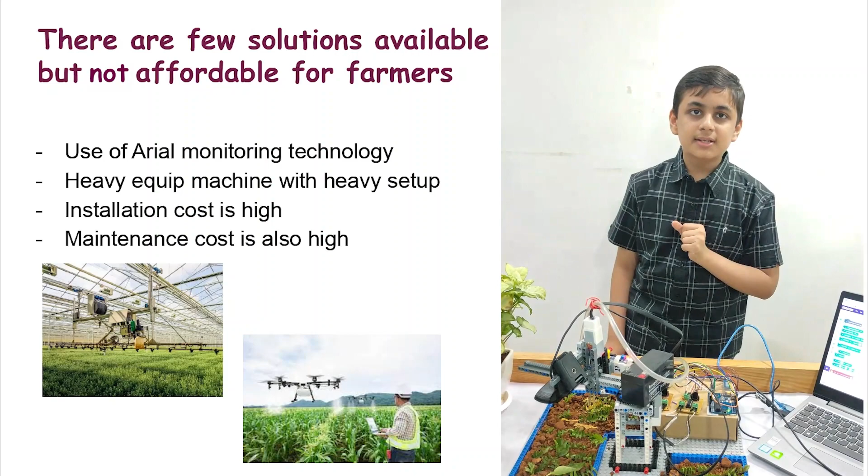Let me tell you a little bit about this project. It's here to solve the hardship of farmers by reducing their workload, as farmers themselves cannot check the acres and acres of land that they own. So some crops go to waste, reducing the crop yield by a lot. This is a solution to all the hardships of the farmers.

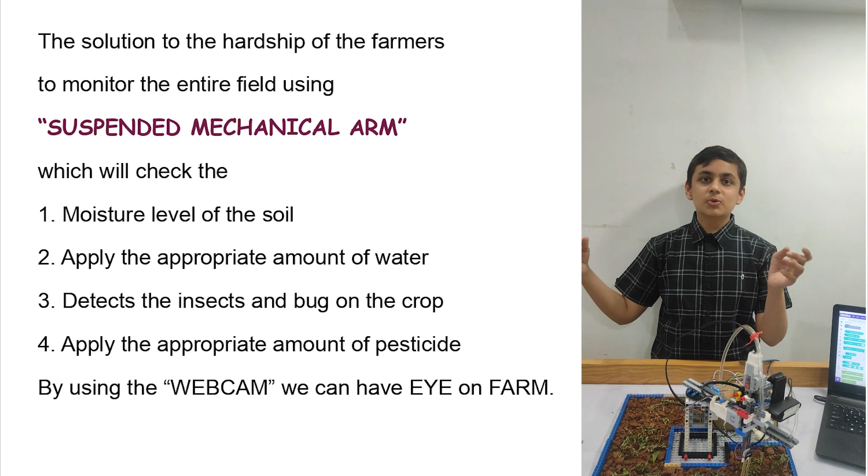This is my robot, the Agribot. I've designed it to be a 360-degree rotation robot. It can monitor the entire area of the farm. It can water the plants. It can check if there are pests and even report the findings to a central control center where the farmer or a worker can monitor the entire farm remotely, freeing the farmer to do various other tasks and not waste their time monitoring the farm plant by plant, reducing the crop yield.

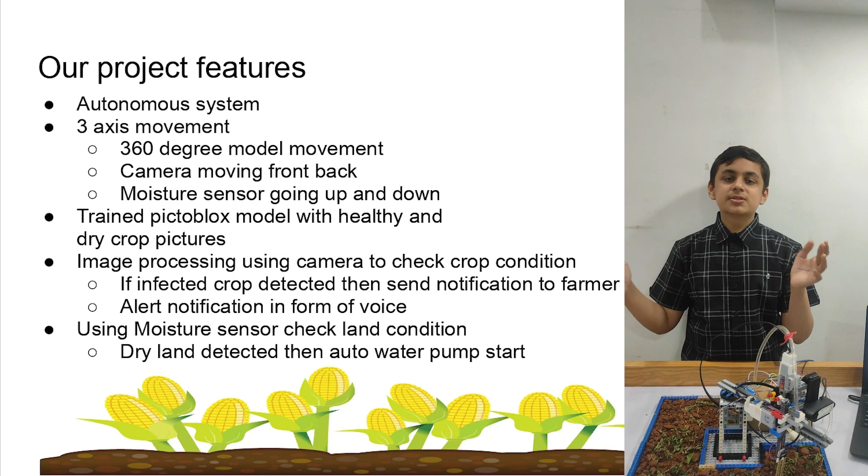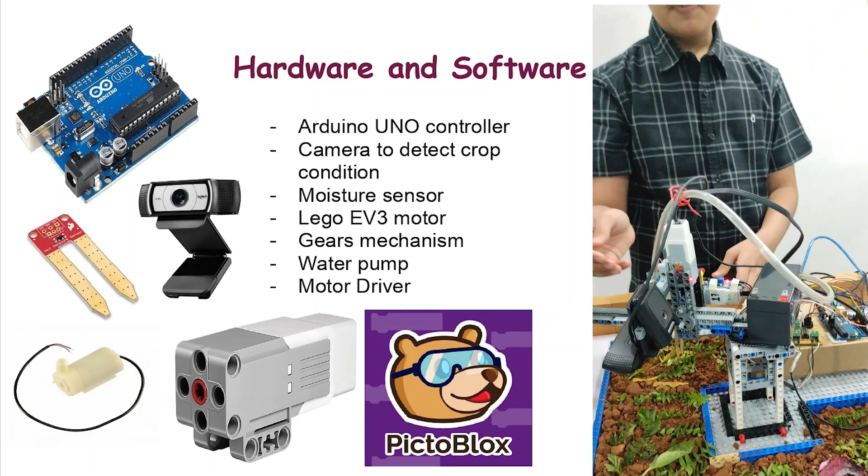Now I'll be explaining the hardware. We're using the PictoBlox software to help with the Arduino, which is connected to the motors used by the motor drivers. We're also using a webcam, a moisture sensor and a water pump. The water pump is to water the plants, the moisture sensor to check if the plants need to be watered, and the webcam to give alerts and check if the plants are infected or not.

In my software, I'm using the lovely PictoBlox software which is helping me turn this complex code into a very simple format. We are using multiple different extensions, for example machine learning, image processing and Arduino to control this entire complex system.

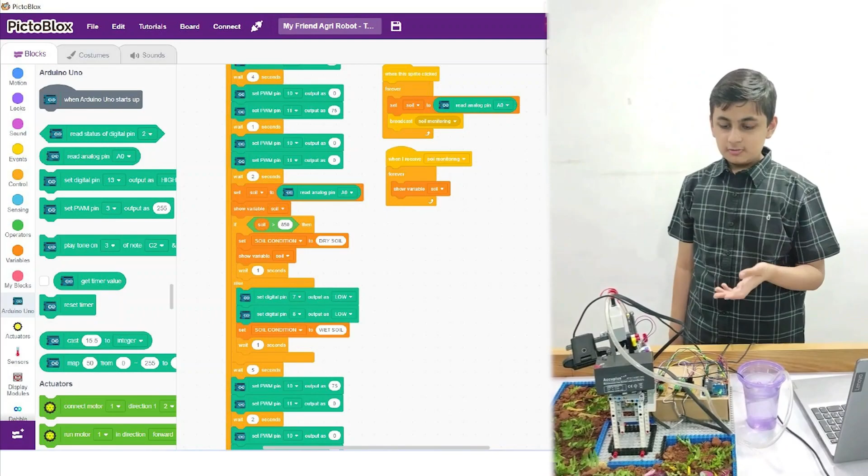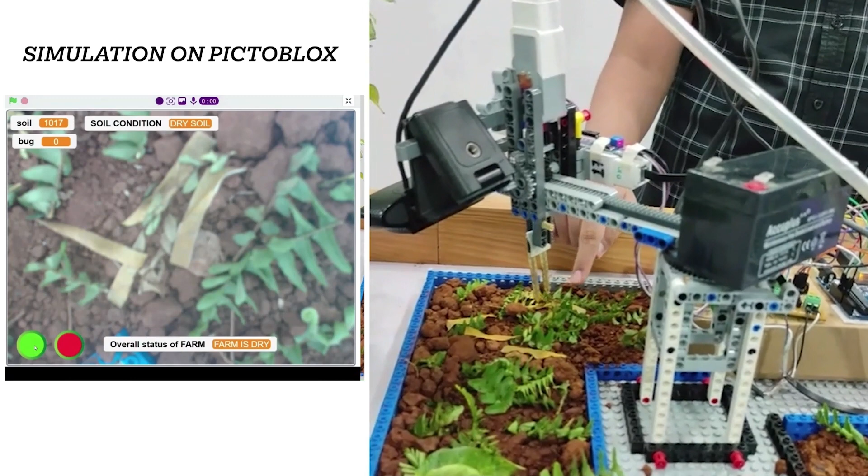Now I'm going to show you the working of my project. This motor will move this forward. This is the moisture sensor which is going to check if the soil needs water or not. Right here the soil is dry, so the motor is going to drop some water now. That makes the soil moist, allowing this to come back up. Now this will go back, and then this will continue on to the next land.

Now again this will be going forward, then down. As you can see, the soil here is already moist, so it's not going to be dropping any water. So now this is going forward and the moisture sensor is going down, and the land here is dry, so it's going to drop some water, and now the land is moist, so the moisture sensor can come back up.

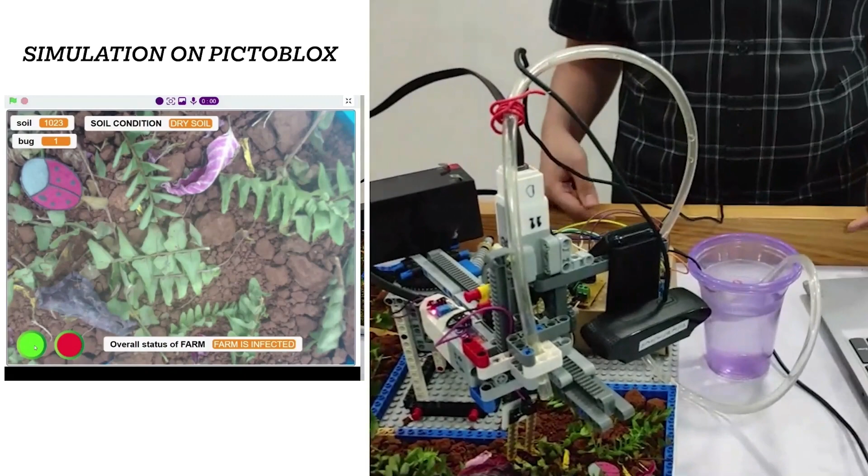Now we're going towards the last plot of land, and over here the webcam will notice that this place is infected. So then it will send an alert to the software telling that this exact plot is infected, and it looks to be dry, so it's now also going to put some water over there.

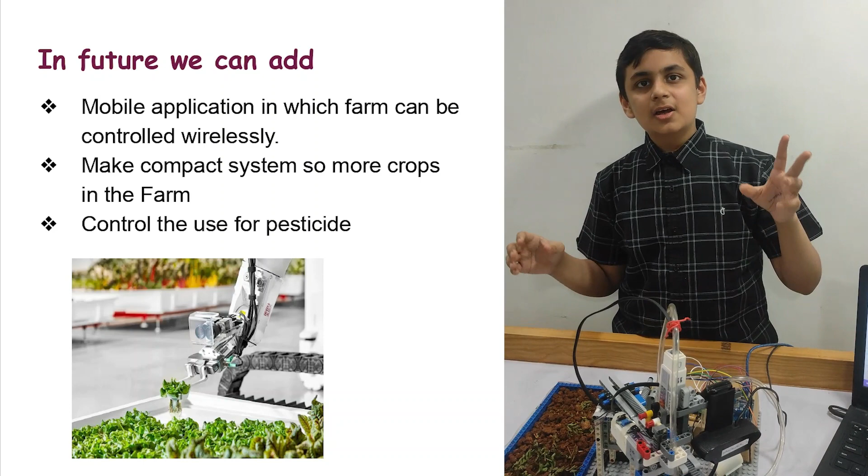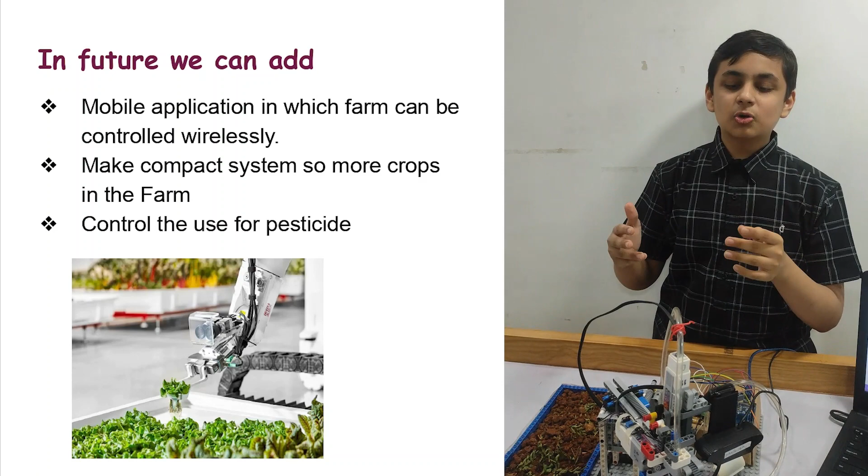So for future scope, we plan to add a lot of things. First, we plan to import this entire software onto a mobile phone, so farmers can use it anywhere across the world. Second, we want to make this entire project more compact, allowing the farmer more space for crops. Finally, we want to add the use of pesticides in a controlled manner, allowing the robot to finish all the tasks of the farmer.